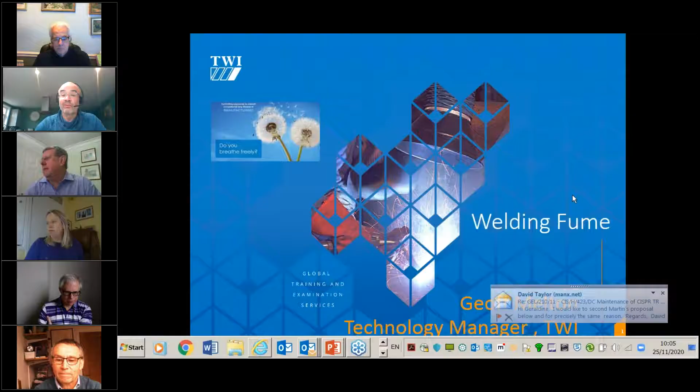This led to developing standards for electromagnetic compatibility, EMC, and the health effects of exposure to electromagnetic fields in welding. At TWI, he leads a wide portfolio of research projects from welding fume to automated welding process developments for low or zero emissions automotive applications.

Geoff also has an MBA from Loughborough University and is a chartered engineer and chartered physicist. So who better than to tell us all about welding fume, how it can harm us, and what we can do about it? So I'll hand over to you now, Geoff.

Thank you. Okay, thanks, Alex. I think, yeah, thanks for that brilliant introduction. I think it certainly got a lot of detail in there. I need to be handed over to my screen, I think. I'm not sure whether I am yet.

Can people see my presentation up now on the screen? Yeah, we've got your presentation, Geoff. So you should be able to crack on with it. Okay, so I'll get rid of my picture so I can't see myself.

Yeah, good morning, everyone. As Alex has told you in a lot of detail, I'm involved in the welding industry. I've been involved in the welding industry for basically the whole of my working life since I graduated, in various roles, including my current role at TWI, which is involved in research for welding and welding aspects of health and safety, and one of those happens to be welding fume.

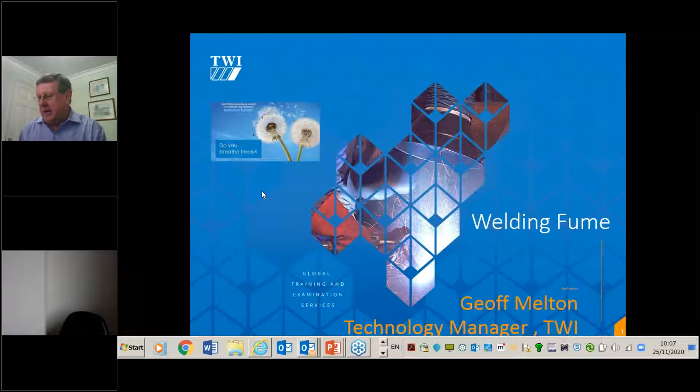So my presentation this morning is about welding fume from my perspective in terms of the work that we're doing, and also the guidance I provide to our member companies. So I have a presentation for you today which covers a bit of the theory of welding fume, and also a bit about how we control welding fume, and my comments are based on feedback we get from our member companies. So I'm hoping if I go on to the next page, which hopefully you can all see now.

TWI, just a very short background to who we are and what we do. TWI, formerly the Welding Institute, headquartered in Cambridge, which is where I am, is a research organisation for the welding industry, and we're a membership-based organisation. So we have around 600 members around the world. We employ around 800 people, turnover 72 million, and we provide all forms of service to the welding industry. If there's anything to do with welding, we're involved, from how to weld materials, how to inspect them, right through to looking at problems that may occur. If something blows up or falls down, we have experts who can advise on what went wrong. So we cover a wide range of topics.

We've got offices around the UK, the main office in Cambridge, where we have our laboratories. We also have laboratories in Middlesbrough, Rotherham. We have an inspection and validation centre in Port Talbot, and we have an office up in Aberdeen to serve the local industry up there.

So we cover everything involved in welding, from how we weld things together, how we ensure the quality of that product, and how we monitor and inspect it. And this is all based around our knowledge of materials and the properties and the performance of those materials. So anyway, the topic today is controlling exposure to welding fume, and I will go through some of the theory of welding fume generation and talk about the control methods for welding fume.

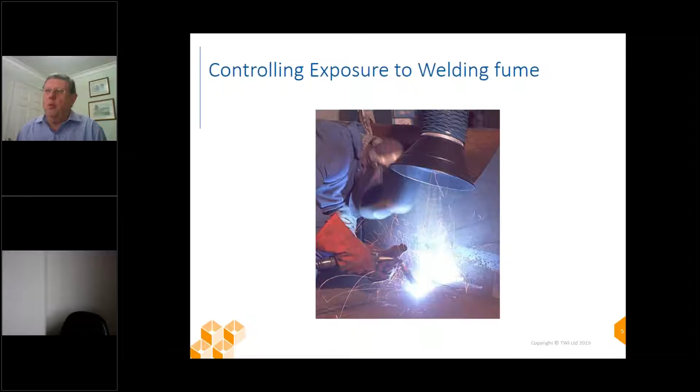There's been a lot of interest, if that's the right word, in welding fume, indeed concerns about welding fume, particularly recently following the IARC publication, monograph 118, where IARC, an international organisation, reclassified welding fume from possibly to definitely carcinogenic. This is a significant change for the industry. Welding fume has many constituents, and some we already know are carcinogens, but this new alert widened that concern for all types of welding fume, not just the fume from stainless steels and nickel alloys, but the fume as well from mild steel processes.

So as a result of the publication of the IARC, after some review by the Health and Safety Executive, there was a safety alert published for mild steel.

This safety alert brings the requirements to control fume in line with those requirements that we've had for many years for stainless steel. But clearly this had a lot of concern within industry, where people then needed further guidance in terms of what they should be doing, the right approach to control welding fume.

Additional to that, there is a continuing reduction in exposure limits for the constituent parts of welding fume. For instance, manganese, where we saw a reduction in the workplace exposure limit in 2018, and hexavalent chrome more recently. And this continues to be the case, and throughout the world exposure limits are falling, and they're falling to very low limits. For instance, for hexavalent chrome, there are now limits in some countries as low as 1 microgram per meter cubed, which is very much on the limit of what you can measure, and very difficult to control.

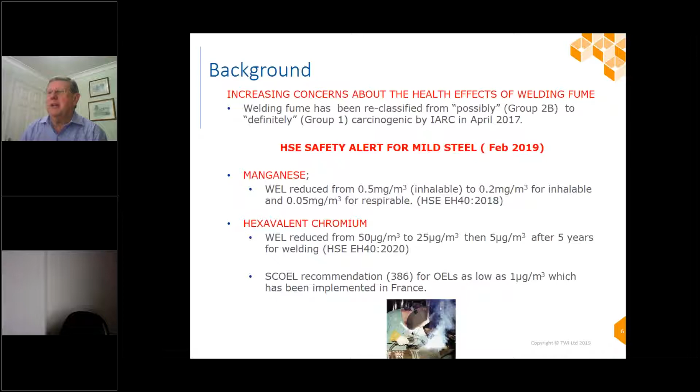So from TWI's point of view, there's a lot more interest in the work that we're doing in trying to minimize exposure to welding fume, and indeed to understand where the welding fume comes from.

Welding processes vary enormously in terms of how much fume they produce. From some of those processes here, which produce very low levels of fume, particularly TIG welding, which is widely used in industry for welding stainless steels, and resistance welding. We have submerged arc welding here, and for those of you that know nothing about welding, submerged arc welding isn't actually underwater, it's under a flux, a granulated flux, and the flux contains the fumes. So we get very low fume from submerged arc.

But if we look at some of the other processes, particularly those that are more widely used in industry, particularly for heavy fabrication, such as the MIG/MAG process, manual metal arc, and the flux core process, we produce a lot more welding fume from the process. And if we look at the hierarchy of control, what we need to do is to reduce the fume at source, particularly from these processes here, which do produce a lot of fume.

We do have arc air gouging here as well, which is a cutting process, and that generates huge amounts of fume. When people had arc air gouging in the past, you could barely see it across the other side of the workshop. Of course, now that's more carefully controlled, but arc air gouging fume is also a particular concern.

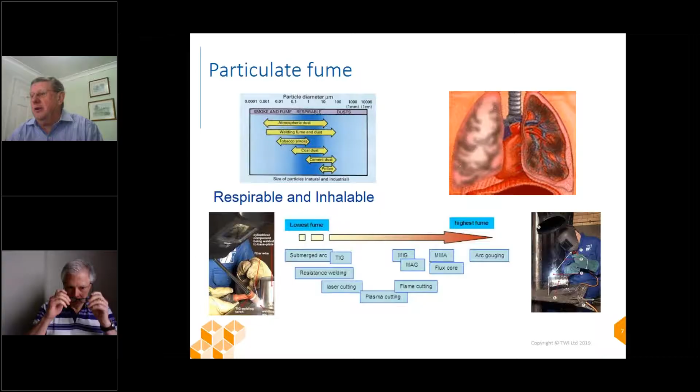Welding fume is of a concern, obviously because it's a carcinogen. It also creates a lot of other diseases. I'm not a medical expert, so I won't go through all these, but it's clear that welding fume, if it's not controlled correctly, can lead to a whole variety of industrial diseases.

There's also concerns from particularly manganese and the effect that that has on the brain. So we have a neurological effect here from welding fume as well, and that's believed to be due to the welders inhaling fume through the nose, and the fume from the nose then goes into the brain. So there are lots of reasons why we need to reduce exposure to welding fume, why we should try and reduce it from the source, and implement good control measures to make sure that our welders can continue to work in a health and safety manner.

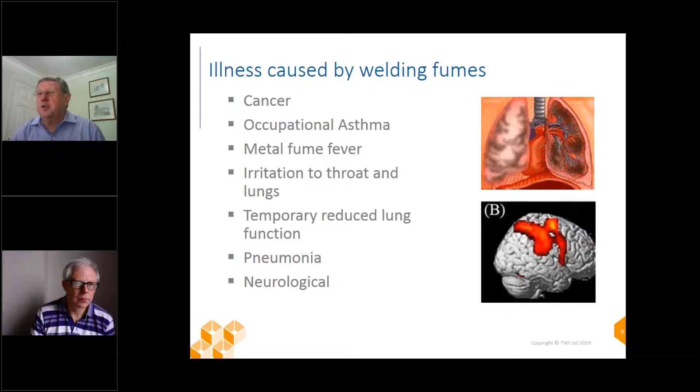So if we look at welding fume from the point of view of trying to reduce it, and a lot of my work is involved in how do we reduce welding fume at source, we need to understand how the welding fume is generated. Welding fume is generated in the welding arc, and it's due to vaporization of the metal, creates a vapor, and also spatter, which is large particles or larger particles that are emitted from the process.

And these particles, the composition of this fume depends very much on the welding consumable we use. So that's the rod or the electrode, rather than the material that we're welding. And that can make a difference, because we can be welding a metal which has a limited composition, but we may want to add other elements to that composition from the consumable, such as nickel, to improve its mechanical properties.

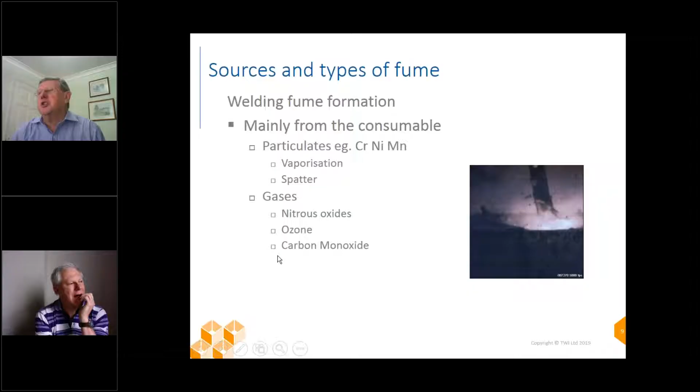So even though we may be welding mild steel, we may still have a consumable which has some other elements which need to be recognized and controlled. Also, welding creates gases. I think gases are often overlooked, not forgotten exactly, but people concentrate on the particulates because we can see those, as opposed to the gases which we can't see but know the process generates. We have nitrous oxides, ozone, and carbon monoxide produced from welding processes.

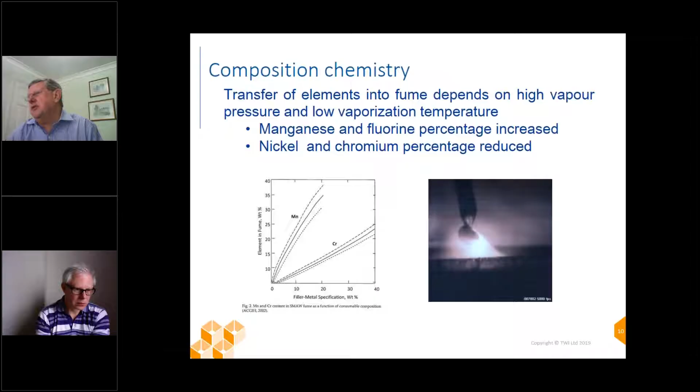Then we get into a bit of physics here, which is quite important when we try to understand the composition of welding fume. Composition is important because we need to control the individual elements in the fume. Some elements transfer much more to the welding fume than others. Although we may have a welding consumable with a relatively low level of manganese, most of that manganese will appear in the fume, unfortunately. So manganese formation is much higher than we'd expect from the composition of the material we're welding, as opposed to chromium, where less is transferred, so the actual percentage of chromium in the welding fume is lower. These are important for understanding how fume is generated and how we can reduce the amount of fume and the composition from that fume.

What I want to talk about is how we can reduce fume at source. So before we move on to control methods such as LEV and RPE, what can we do from the welding process which will reduce the fume? First, how can we develop new technologies for reducing fume, and secondly, understand how we can use these technologies in manufacturing to produce lower levels of fume. As the limits come down for fume, as workplace exposure limits are reduced, it becomes more and more important that we can actually reduce the amount of fume produced at source.

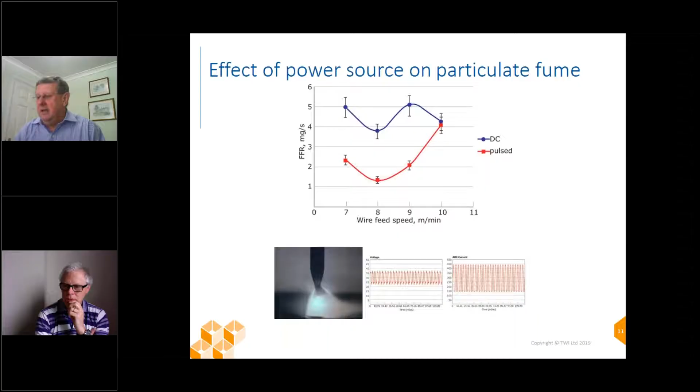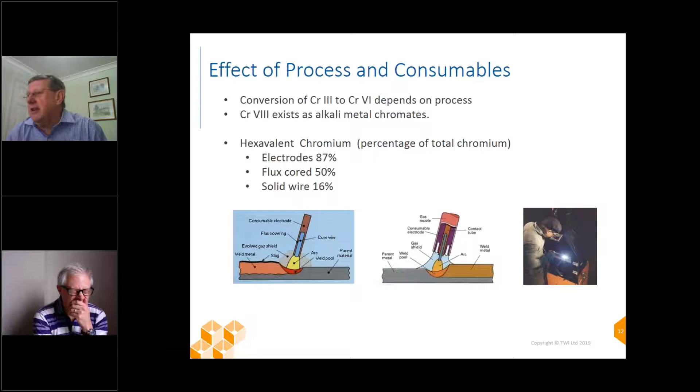If we use a solid wire, the hexavalent chromium is relatively low in the fume. If we use a flux cored wire, it's much higher. So from a non-welding point of view, you may ask, why would we want to use a process that generates far more hexavalent chromium than this one? Well, the reason is that the flux cored wire process has certain attributes that make it better from the point of view of making a weld. We can make welds at higher deposition rate, in different positions, and indeed it's easier for the welder to use a flux cored wire than a solid wire in many applications. So we need to balance the welding process against the amount of fume produced to ensure we can make good high quality welds while at the same time reducing the amount of fume and certain compositions in that fume.

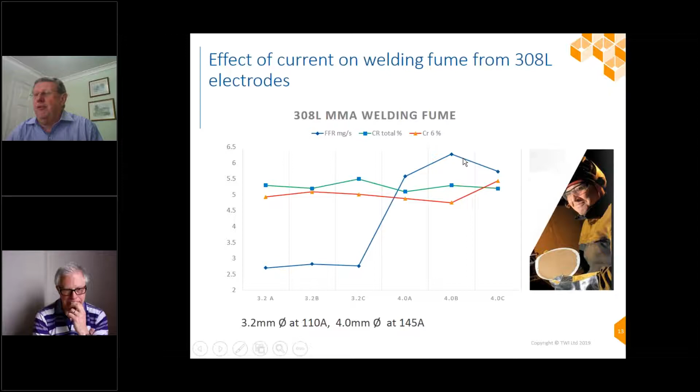The other aspect is just the welding current we use, and generally if we're using high welding currents, we produce a lot more fume than if we're using a lower welding current. The important thing I'm trying to say here is that welding fume varies depending on the process we use and the welding parameters we use. So it's actually quite complicated in terms of how much fume is produced from a given process. It varies on so many things.

One of the other things that affects welding fume is the voltage, which comes down to welder technique. Some welders run a long arc length, giving a high voltage, which produces a lot more ozone than welders using a lower voltage and shorter arc length. So even using the same welding parameters, different welders will produce a different amount of fume. Ozone is generated as soon as a welder starts welding and has a short-term exposure limit value, so it's very important that we control the amount of ozone produced from the process.

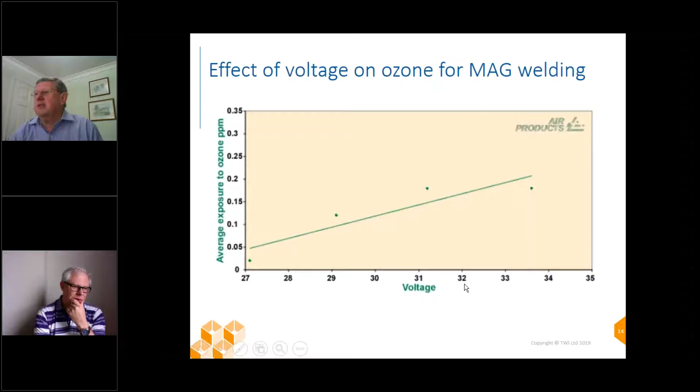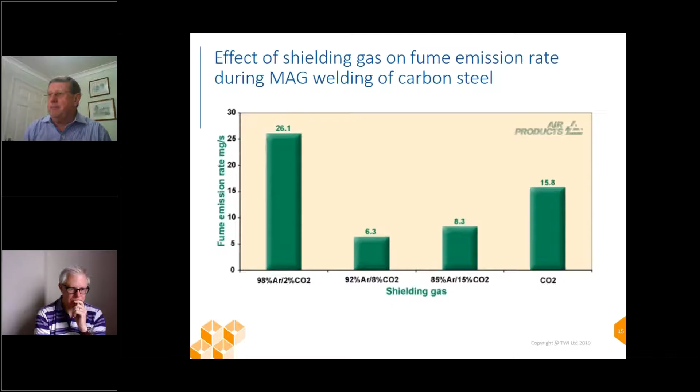TWI does a lot of research into welding fume, and another aspect of our work is supporting member companies, particularly those producing welding consumables with low fume. We provide a service where we can independently test and validate their claims on welding consumables. This is an example of work we did for one welding consumable manufacturer, who developed a product producing significantly less hexavalent chrome, up to 60%.

We have facilities in Cambridge to do fume measurements using a fume box such as this, where we run an arc under the hood, and the fume is sucked through into a filter paper, which Mark is holding here, and then we analyze that filter paper to tell us how much fume is produced and its composition. This is similar equipment we use for manual metal arc welding. So we have processes to measure fume from a whole variety of welding processes, both in the laboratory and on site, where we can go to member companies and do breathing zone measurements for them.

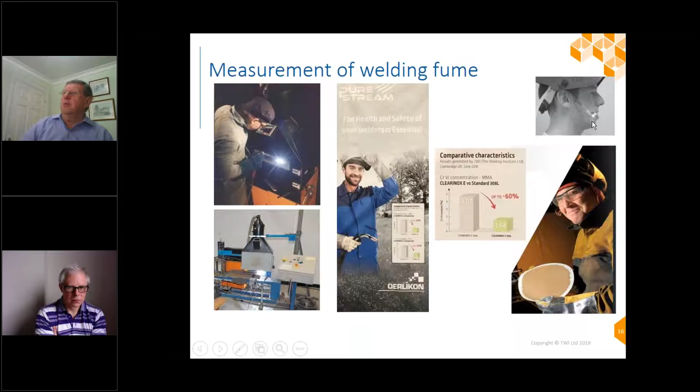Welding exposure limits are continually changing, continually coming down, and there's been a lot of activity in the last couple of years with reductions in the exposure limits for manganese, hexavalent chromium, and also for gases. It's important for the welding industry to keep up with these changes as published in EH40, and one of the roles we provide at TWI is to inform our members of these changes. This also leads to more research into how we can control down to these lower limits, and advice to member companies on control methods to provide control of these reduced limits.

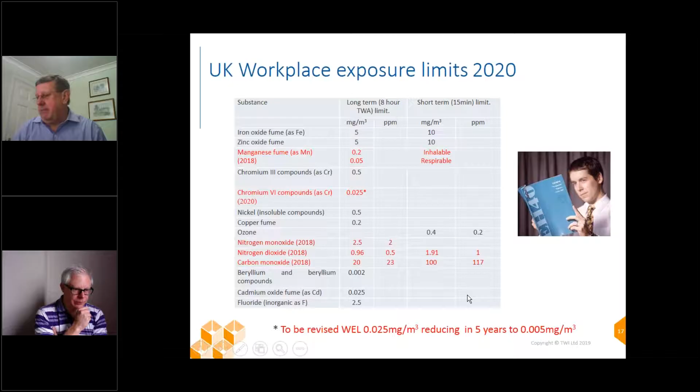Control methods and control measures follow a hierarchy of control for welding fume. We try to reduce the amount of fume at source, using different equipment and different consumables as I've described. Improvements in working practice are also important - basically keep your head out of the fume, but also consider how we present the material to the welder so he can weld in a position where he's not overexposed, or avoid positions where welding fume may accumulate due to the nature and position of the weld. So moving components around to provide better access can also reduce exposure to welding fume.

The next, of course, is ventilation, LEV. LEV is generally required, in fact, pretty much always required these days for control of welding fume. And providing LEV is used in the right way, it can provide good control of fume, reducing fume exposure by up to 80% or more in certain circumstances.

The limitation of LEV is that it's a relatively small hood, and it has to be moved into the right position with regard to welding to make sure the fume is captured. When welding a long structure, this isn't always achieved by the welder, if I can put it that way. So there are limitations in using LEV.

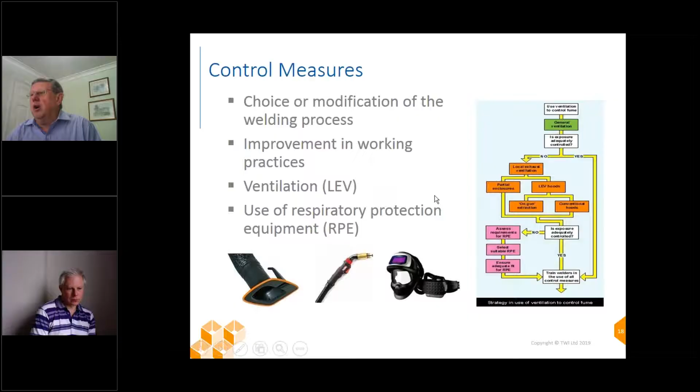So I always like to stress that these other methods, where we're controlling the fume locally, preventing the fume going into the workshop, are important from the point of view of protecting everyone in the workshop, and not just the welder who is protected by his RPE.

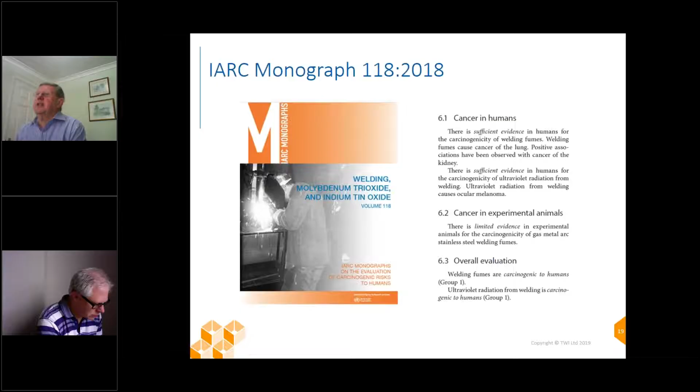So just to finish off, looking at the recommendations for controlling welding fume, this really stems in the UK from the publication of the IARC monograph back in 2017-2018, where welding fume was reclassified as a carcinogen, which led to the safety alert from the HSE.

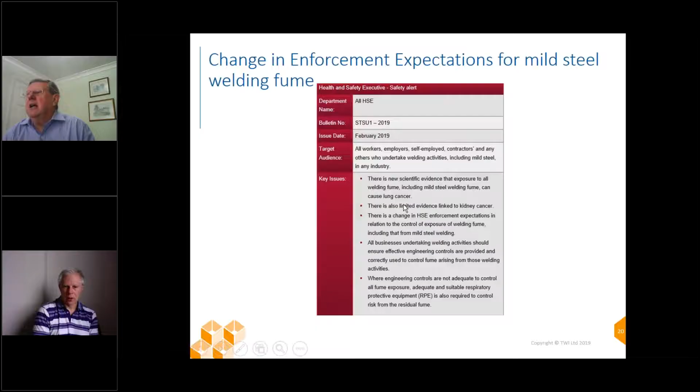A very short statement was issued in February 2019, giving clear guidance in terms of how we need to protect our welders from welding fume from all processes, and particularly now for mild steel, as this guidance has been in place for stainless steel fume for quite some time.

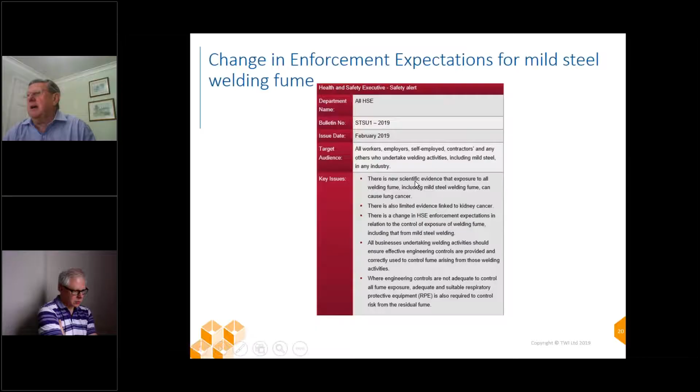I won't dwell on this because that has since been updated. The guidance is clearer now since February 2019.

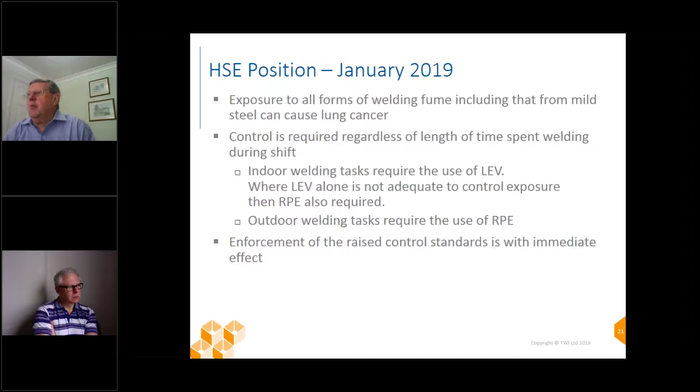Basically, the guidance at that time was that we should use LEV for control of welding fume in all circumstances, apart from when we're welding outside, where RPE should be used. I will go on to talk a bit more about that in another slide.

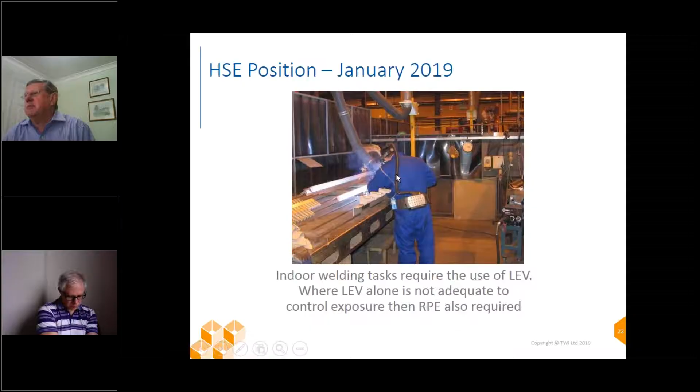But basically LEV is a good method of control of welding fume, and we see here a picture of a welder with LEV and also RPE being used on a workbench. It works quite well on a workbench, but sometimes if we're working on larger components, it can be difficult to control the fume using this method.

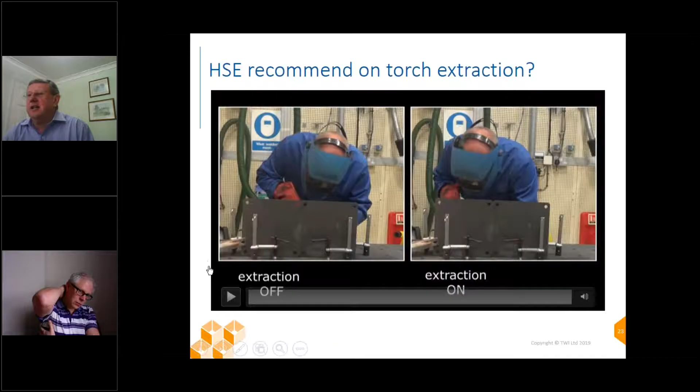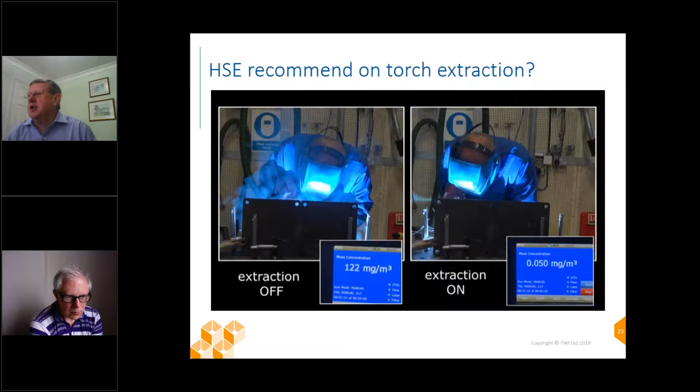We have a good video here that I've borrowed from one of my contacts at HSE, which shows how we can use torch extraction, and that can be quite effective in the right circumstances. We'll see in this video a significant reduction in welding fume.

It works particularly well in this position where the welder is welding downhand, so the fume extraction is over the welding arc. But when welding in different positions, that does not provide such good control as maybe the LEV or the RPE would.

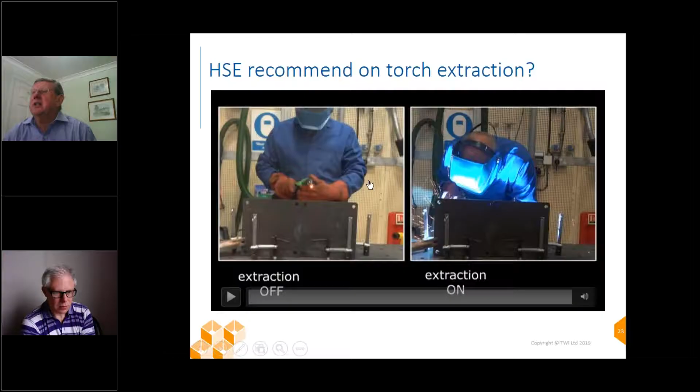Welding in confined space is a particular issue because in confined spaces we have build-up of gases. So if welding is being carried out in confined spaces or spaces where fume may be trapped, it's also important to look at the amount of fume and gases generated from the process.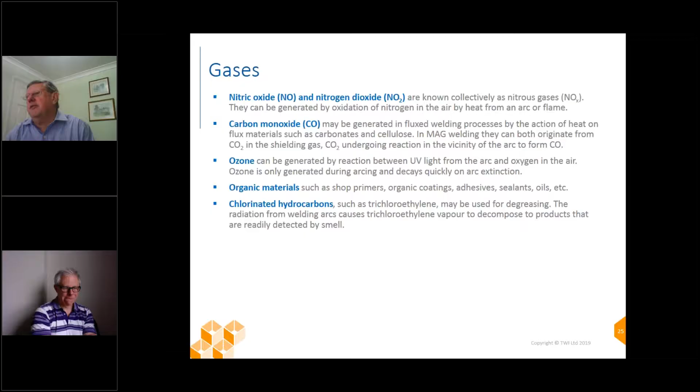So, sources of information: the HSE website is a very good source of information. It's got some excellent guidance and recommendations on welding fume, and it's good to see that now some of the work at TWI is being referenced on the HSE website as well, particularly information about the welding processes.

WL3 was issued since the safety alert, in 2019, and this provides a bit more guidance in terms of recommendations on controlling welding fume. There's a table in WL3 which provides information about controlling welding fume depending on the process and the intensity of use.

In general, the guidance is the same: LEV, and if that's not sufficient, then RPE should be used. But there are cases where we have very low levels of welding activity, such as in repair and maintenance, where general ventilation can be sufficient to control welding fume. This is an important document and needs to be studied carefully to work out the correct control methods, depending on the process and the time that welding is taking place.

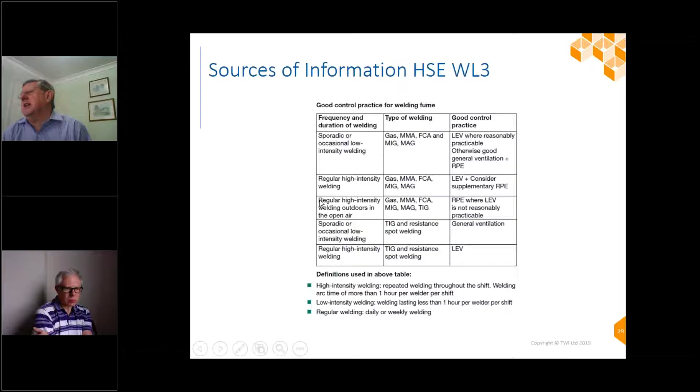TWI is also a good source of information. We publish a lot of information on our website, very much related to welding fume, how it's generated, and control of that welding fume. There is also, of course, last but not least, the Breathe Freely website, and Neil is going to talk next about the Breathe Freely website.

So I've really skipped through quite a few aspects of welding fume, hopefully giving you a good introduction about what it is and how it's produced and how we control it. So at that point, I'd like to thank you and ask for any questions.

Breathe Freely Manufacturing, as we know, focuses on welding because of the combination of significant hazard and a wide range and number of people potentially exposed to welding fumes and gases. When we started pulling this together 3 years ago or thereabouts, we worked with the HSE, and their best estimate was there was about 190,000 workers exposed to welding fume in Great Britain. That ranges from those employed as welders and spending most of their time welding or preparing to weld, to those who do short welding for maintenance or repair tasks. Some will be welding mild steel, others will weld on stainless steel or more exotic alloys with varying toxicity of the metals involved. We'll consider a bit more about that later.

Of course, there's also a number of people that aren't really welders but are involved or exposed to the welding fume, and certainly in my time at JCB we identified that supervisors, potentially forklift truck drivers, and others that spend a lot of time in a welding area are of course exposed to the welding fume as well.

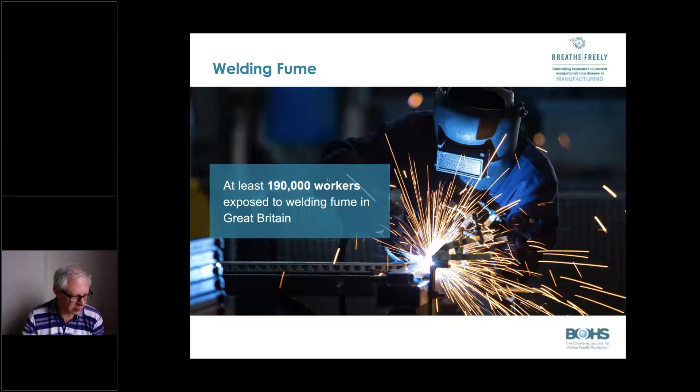From the data that HSE was working with when we were pulling this together, we estimated there are 152 deaths from cancer every year due to welding fume, maybe from the more hazardous metals in the fume, or as recent scientific evidence has shown, exposure to general welding fume.

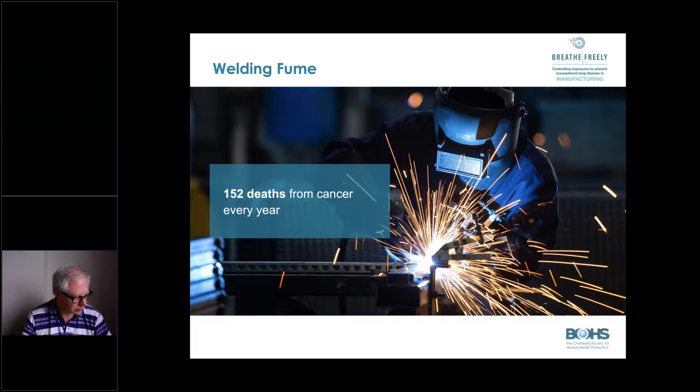Jeff's already gone through a number of these, and like Jeff, I'm no medic, but there are a number of ill health conditions associated with welding at work: asthma, cancer, chronic obstructive pulmonary disease, pneumonia, effects on the nervous system and metal fume fever, reduced lung function, throat and lung irritation. So some significant short and long-term effects that can seriously impact the health of an individual while welding.

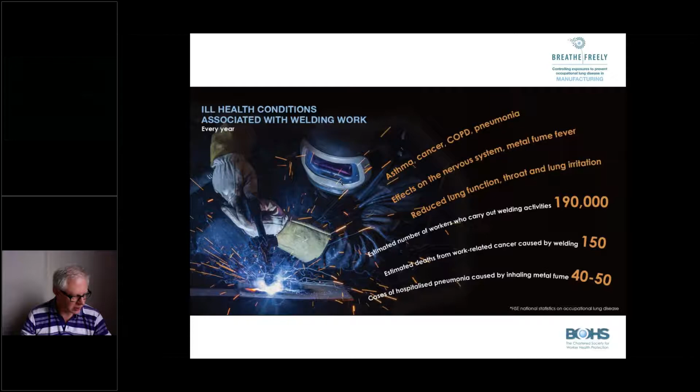As a result of this, we launched our BOHS Breathe Freely 2 campaign for manufacturing in May of 2017 in London.

There were other launch partners in addition to BOHS, the HSE, and Make UK, and we were pleased to have a tripartite approach. So in addition to Make UK and the HSE, TUC were involved, TWI, and obviously we just had Jeff speaking, and 3 manufacturers with significant welding activity: Toyota, JCB, and BAE Systems. Between them, the launch partners agreed the focus, messaging, and developed the materials for the campaign.

We pulled together an information hub, and I'm sure many of you have been to this information hub to take a look, maybe for construction, maybe for manufacturing. If you haven't, please do, there's a lot of information there. We're in the process of revamping the website, but the information itself is actually good, and we don't need to change a great deal, so it's well worth going to take a look.

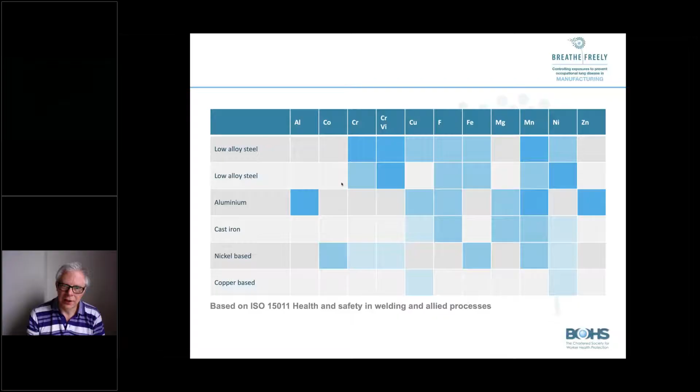Jeff's already gone through a little bit on this, so I'm not going to focus too much on it, but we know that there are different components to welding fume depending on the metals and the type of welding we're actually doing. It comes from the base metal, and it also comes from welding rod or wire. Clearly there are some metals here that are of greater concern than others, but something that we need to be aware of when we're doing any assessments of exposures to that welding fume.

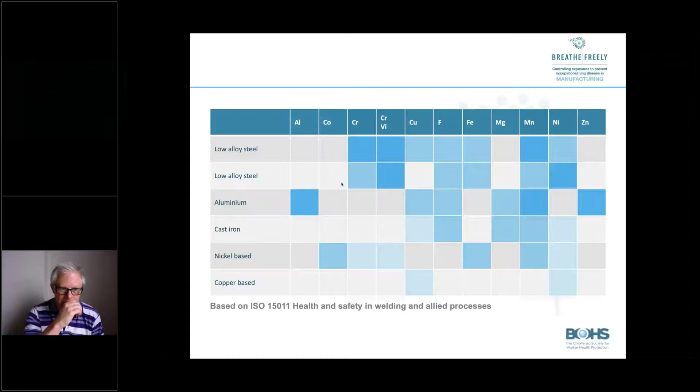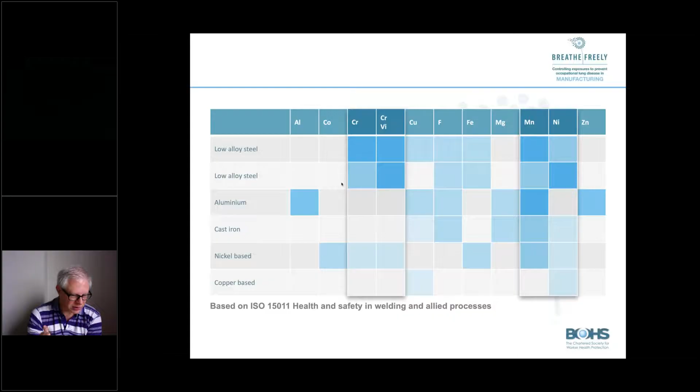From the perspective of welding fume components, these are the ones of greatest concern. Again, Jeff's gone through some of this, so I'm not going to labour it, but it's based on the toxicity and the prevalence of welding on the specified types of material. So low alloy steel can potentially lead to chromium in the fume, chromium, hexavalent chromium, manganese, and nickel.

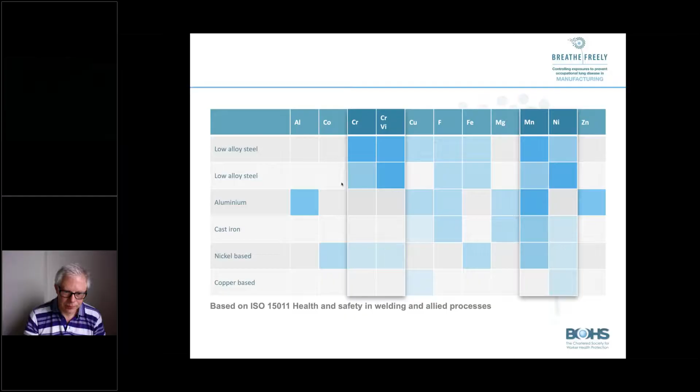We've already seen the workplace exposure limits, just making sure they're here. As we know, the workplace exposure limits for some of these components are tight or very tight and are likely to be exceeded unless we've got effective controls implemented.

Following a change to the limits in August of 2018, the WEL for manganese is now as restricted as hexavalent chromium, although of course that's going to tighten further for the respirable fraction. This is particularly important for duty holders using metal inert gas on low alloy mild steel.

This often involves manganese in the welding consumable. As we've seen in the graph Jeff showed earlier, even though it may only form 1 or 2% in the consumable itself, manganese is more volatile and can be up to 10 times that proportion in the welding fume. Certainly at my time in JCB, that's exactly what we found.

We were working with 1.5% manganese in the welding consumable, but actually in the fume it's about 15%. Therefore, the tenfold reduction in the WEL for manganese in August 2018 makes effective control of exposures much more challenging than it was previously for MIG on low alloy steels.

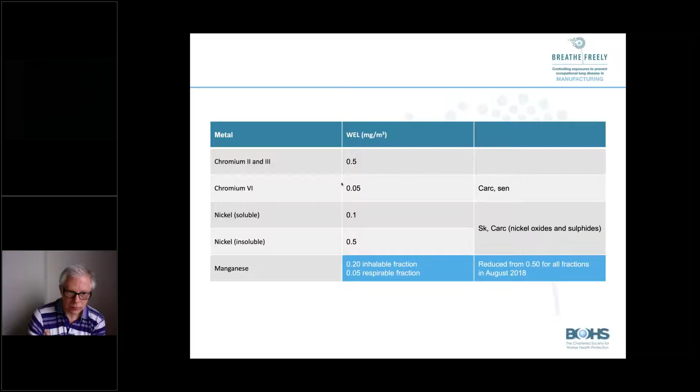But it's no longer just certain components of welding fume that are identified as carcinogens. I'm sure you're aware that as a result of an extensive review by the International Agency for Research on Cancer, they reclassified all welding fume as a Category 1 known human carcinogen for lung cancer in July of 2018.

They also identified some evidence of a link to kidney cancer, but were unable to form quite such a positive link as they did for lung cancer.

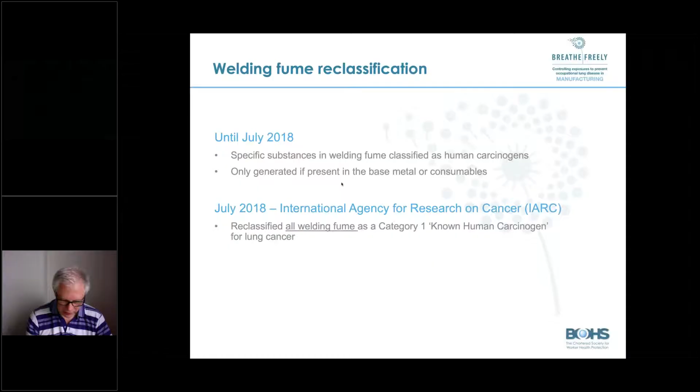So HSE enforcement expectations were reviewed as a result of the IARC reclassification, and HSE concluded that risks had changed so markedly that a safety alert was justified, and that was issued in February of 2019.

That essentially now says that for any internal welding inside, you need LEV. That's a significant step change, particularly for MIG welding, where previously that hasn't really been the case. There's been a lot of MIG welding done without LEV in place because it was considered to be relatively benign. Clearly that is no longer the case, and extraction is now required.

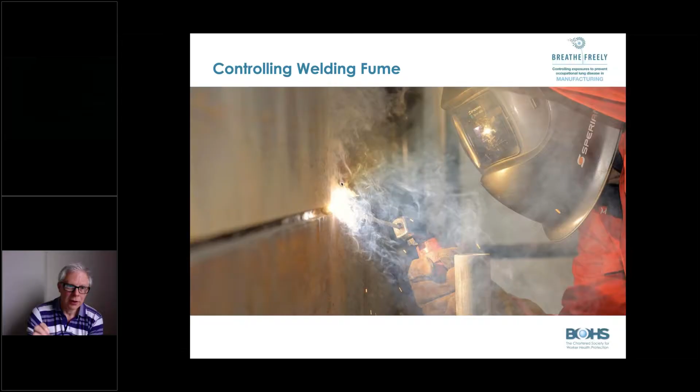I'm only briefly going to consider control. Jeff's already covered this in more detail in his presentation, but we're all well aware and very familiar with the hierarchy of control, from the most effective at the top to the least at the bottom. Often several controls are required from different parts of the hierarchy, and Jeff has worked through a range of approaches to consider.

Clearly, if we can eliminate, we should eliminate the process. There is a possibility of moving to an alternative joining technique, maybe glues, or maybe a different type of welding that doesn't actually require quite the same process with quite the same fume coming off.

Also a possibility of process modification, so automation - a robot that's doing the welding, it can be completely enclosed and the fume can be extracted, and the people are taken away from the process.

Of course, local extraction, Jeff talked about on-torch extraction, that can be very useful, particularly for very large components. If you've got smaller components, actually a bench type extraction is also a very good way of doing it. Downdraft or backdraft can be very effective. And of course, there's the elephant's trunk, which, as Jeff pointed out quite rightly, the welder tends not to move and therefore it tends to be a little unreliable.

Jeff talked about working practices and the possibilities around changing welding parameters, but also about reorganizing the workplace and reorientating the weld to make extraction easier and work easier. And of course, there's RPE.

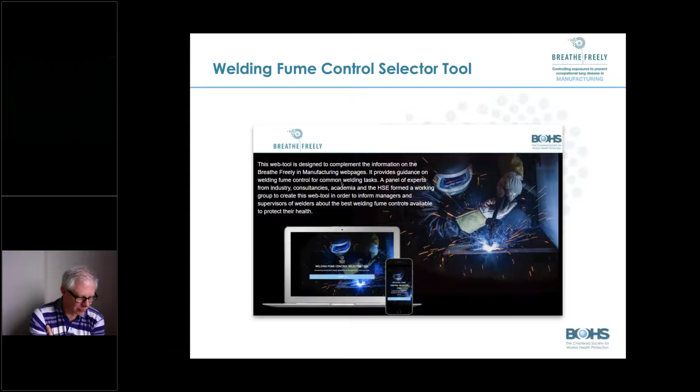Of course, you may find yourselves helping that duty holder. So let's take a look at what we can get out of the selector tool.

Well, first of all, an introduction to the working group, which included members from BOHS, representatives from the HSE, and is endorsed by the HSE as an effective method of selecting the right control.

Starting at the back left, we have Andrew Kennedy, Mike Slater, John Saunders, Don Pocock and Adrian Hurst. And on the front row, left to right, we have Dave Marsh, Adrian Paris and Marion Malloy. They pulled a great bit of work together in creating the welding fume control selector tool.

To help duty holders, we used a 5-star rating system to show real-world effectiveness of the extraction systems recommended by the tool. The overall rating is derived from the average of the 2 scores for the fume control system and user reliability. The system rating assumes an appropriately designed system which is matched to the process, is in good working order, and is set up so it can be used correctly.

The user rating is based on how much control the user has. So if the control is heavily dependent on the user, it will have a low reliability score. If it's fixed in the right position, it will have a high score. You probably already figured out that the flexible and movable outputs trunk arrangement scores poorly on the user rating because, as we know, it tends not to get moved.

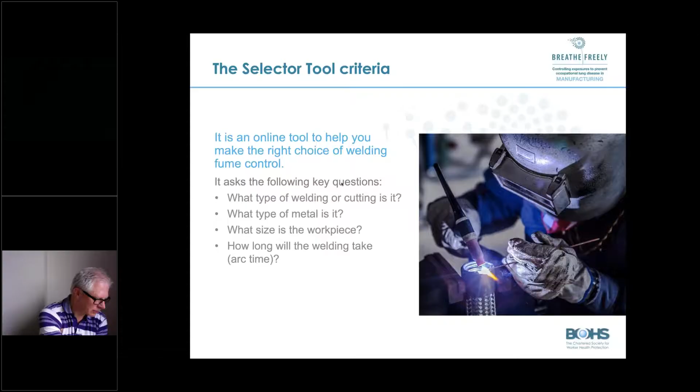The selector tool provides advice on the best available control solution for the task criteria selected by the user. It also provides links to other suitable alternative fume control solutions, as it is recognised that for one-off jobs it may not always be possible to have the optimum control solution available. And with every fume control solution, there are limitations to its use and its ability to adequately capture fume, which are addressed on each control sheet.

Our intent was to develop a tool that was simple to use but not simplistic in the information it provides, so that it was useful for the duty holders. I'm pleased to say that the selector tool has been endorsed by the HSE and the duty holders are frequently directed to it by them.

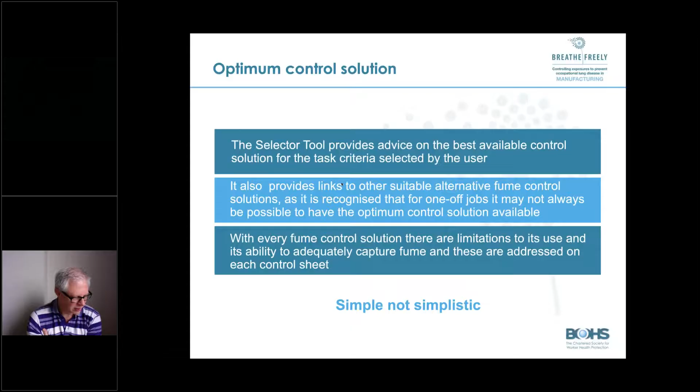To help duty holders, we also provide management advice sheets from links in the control sheets with appropriate advice on a number of topics, including the design of LEV, the installation, commissioning and testing of LEV, and health surveillance.

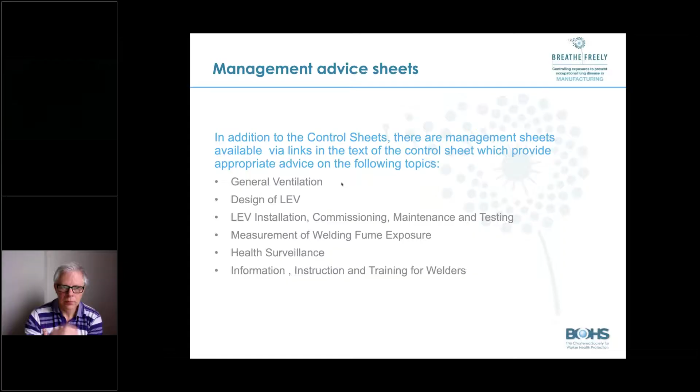Normally, I'd go into a demo of the tool and have everything crossed as it would work on the available Wi-Fi. However, that seemed too much of a stretch for today while using the connection to also present to you all. So what I'm going to do instead is suggest that you take a look, preferably at the end of the regional meeting, but if you must have a fiddle with it now, then please go ahead once you've heard from the presenters. When you do have a go, I hope you'll all agree it's simple and easy to use while giving some useful advice.

Of course, any suggestions for making it better are always welcome. We're in the middle of a review of it at the moment to do just that. So if you've got any suggestions, please do let us know.

Given the resource challenges experienced in 2019, we recognised that any new approach had to be sustainable for BOHS, so we're focusing on a number of key areas. Following feedback from our colleagues in the LEV industry and following up on a planned refresh, we've initiated the review of the welding control selector tool.

I'm pleased to say that some of our LEV colleagues have joined us in this review, so the working party has a wider group of stakeholders involved. As part of the update to the BOHS website, the Breathe Freely site will also be redesigned to draw in more traffic, assisted by our colleagues in TWI, who are providing some excellent input.

As Chris has already explained, I've had the pleasure of working with Mike Slater to update the CCHRC, the Certificate in Controlling Health Risks in Construction, training courses, which have been successfully piloted and will be launched again next year. This update has restructured that course, facilitating conversion into other areas such as manufacturing, mining and so on.

And we expect to follow on the construction review with work on equivalent manufacturing courses. I'm also pleased to say that Breathe Freely has expanded globally with our colleagues in Australia and New Zealand picking up the baton.

And in fact, Australia at the moment are working on some advice and guidance for people welding outside. They did wonder whether we might want to help them with doing that, but I suggested to them that there's probably only about 3 or 4 days in a year when we would even consider working outside without some sort of enclosure, so they were much better placed to do it than we were.

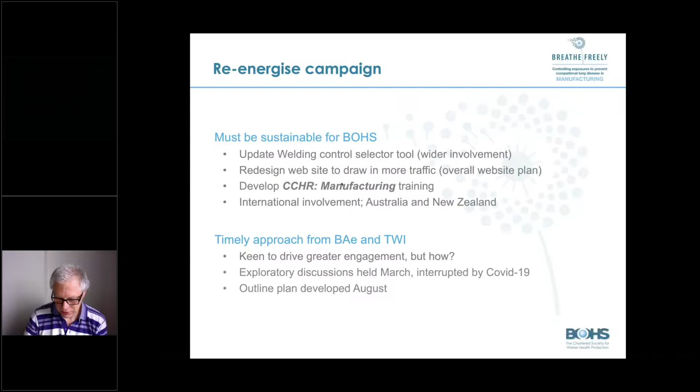We've aligned our strategic objectives between the 2 Breathe Freely campaigns, the delivery of which will be modified by the specifics of each campaign. We use a multi-channel communications and marketing plan to reach all key audiences.

For the manufacturing campaign, that means we'll leverage TWI and consumable suppliers contacts. We'll re-engage our steering group, look to recruit new participants and volunteers to avoid reliance on just a few people, look to generate media coverage in as many ways as Rita in head office can come up with, helped by the volunteers, of course, influence decision makers when the opportunity presents itself, and motivate our stakeholders, of which we need many more, to embrace and share the campaign and spread the word.

Of course, our ultimate vision is to reduce the risk of occupational lung disease.

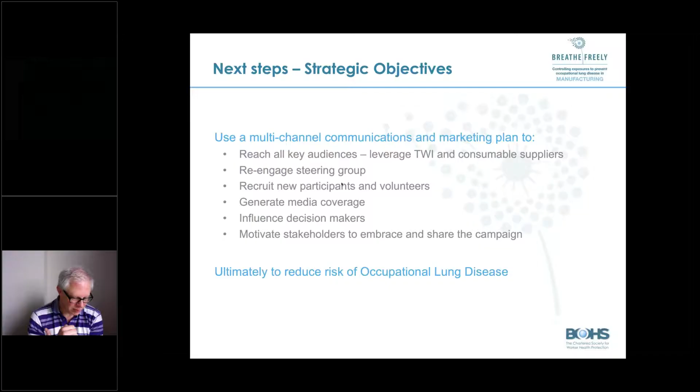I know you're all muted, but I can still hear you all asking, but Neil, how can we help? Well, I'm glad you asked. We always welcome new ideas and anything you think will help the campaign.

Any new ways of connecting with duty holders who are not currently aware that Breathe Freely exists or who have not engaged fully with it. Perhaps you can volunteer to help out in whatever way you think you can. How about new links into stakeholders, particularly those with further links into further duty holders? Or perhaps you can help champion what we're doing. LinkedIn can be a tremendous tool to do that.

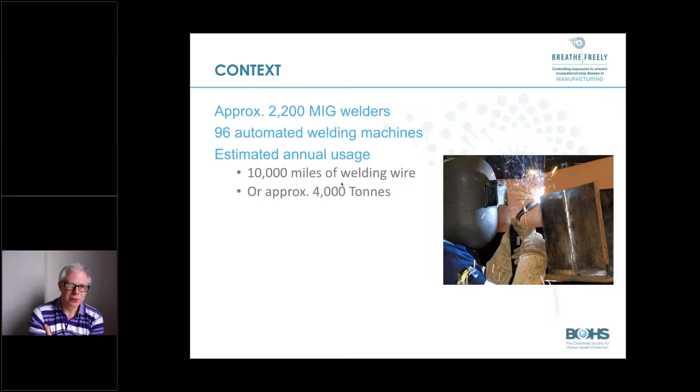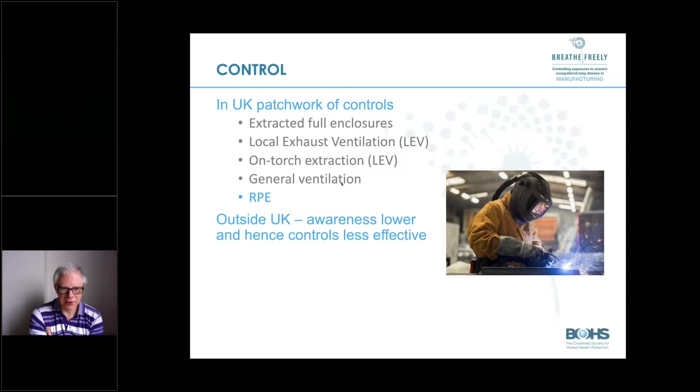In the UK, we had a patchwork of controls. We had extracted full enclosures, local exhaust ventilation, on-torch extraction, general ventilation, and respiratory protective equipment. Outside the UK, the awareness was lower, and hence the controls were less effective.

The manganese limit was challenging for MIG on mild steel. As we've said before, 1 to 2% manganese in welding rod, but 10 to 15% in the fume itself. The varied controls meant that sometimes we relied on RPE, so we did some analysis.

Of 21 personal exposure measurements that we had outside the RPE, 18 of those, 86%, exceeded the new manganese WEL. Previously, it had just been 10% exceeded. Without RPE, our welders would have been overexposed.

Of course, that also asks the question about supervisors and other people that are working in there. And yes, there were some of those that were being significantly exposed to manganese respirable fraction.

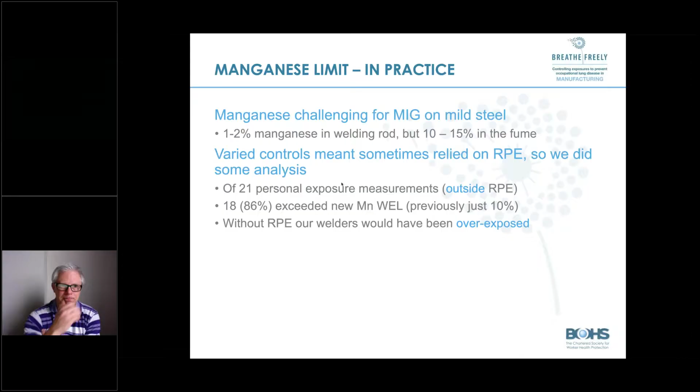So we needed a commitment to action. We recognise this as a global significant potential health risk. We proposed and got buy-in to a global project, which was brought off at the HS&E board.

We appointed a senior sponsor, an MD, to one of the businesses. We pulled together a project team and a leader, obtained external expertise to assist us, and monitor progress through our governance process.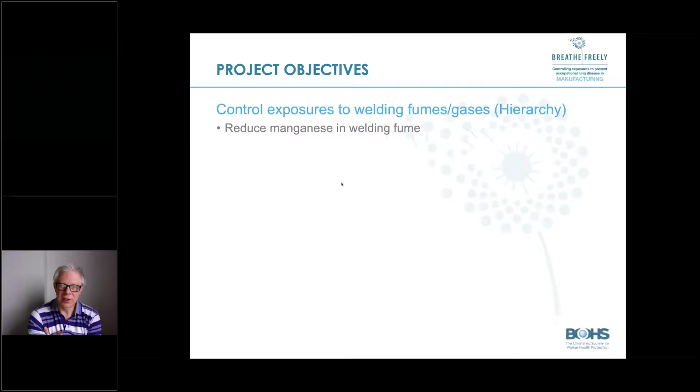In terms of our project objectives, we look to control exposures to welding fumes and gases using the hierarchy. Reduce manganese in the welding fume. Consider alternate joining techniques, automation and reduced welding.

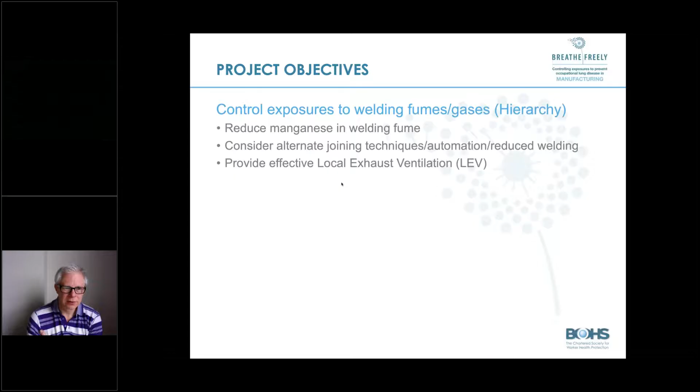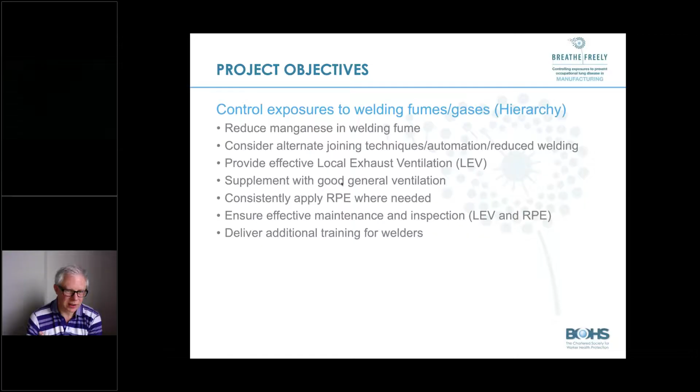Provide effective LEV. Supplement with good general ventilation. Consistently apply RPE where it was needed, and ensure effective maintenance and inspection of that LEV and RPE. And also deliver some additional training for our welders to make sure they understood what we were doing and why we were doing it.

In terms of the activities, we did a review. So we used external occupational hygienists to review our welding processes. We wanted to give clear advice and support on good practice control.

We did very limited exposure assessments at this stage. We used the Mark 1 eyeball to take a look at the welding and to decide whether a particular type of LEV was most suited to the task. In many of our cases, our components were big, so it turned out that on-torch extraction was the most effective.

But we did have some cases where the on-site review was able to identify the possibility of downdraft booths or other extracted enclosures in order to do effective control.

We did a little bit of exposure assessments to confirm control, but only after we'd made improvements. We didn't try and measure where we knew we'd already got a problem.

We also took a look at the robot extraction systems to see how effective they were. And as you might imagine, they range from being completely effective to being entirely the opposite, with fume leaking out the sides, because the robot had been changed, maybe the dimensions had changed, maybe the weld went a little further than it did originally, and it got out of the extraction system.

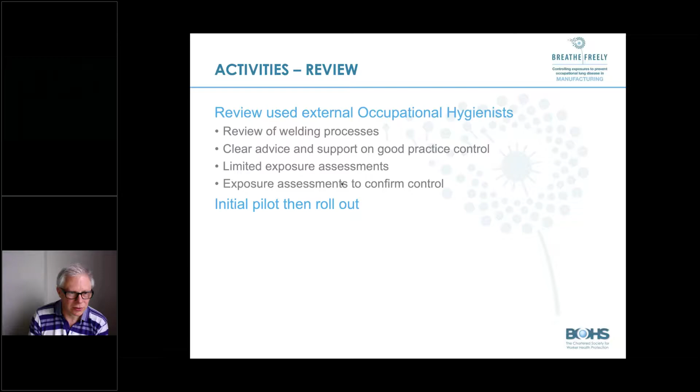Once we'd done a pilot of the review on site, we rolled it out across the organisation. As I said, we really did need to employ on-torch extraction because we had large components, complicated components, and it wasn't possible to get LEV into the right places other than on-torch.

So we did some on-torch extraction trials to test the new generation of weld sets, and I have to say they were a lot better than the previous generation of weld sets. We had Group Manufacturing Engineering involved in this, and they led on this particular aspect of it. We had 5 suppliers in the trial.

The effectiveness varied, to be honest, and partly that was the way it was set up, and partly it was just the kit that they used. What we did do, though, was we gave them free rein to set their kit up, so there could be no complaints from the suppliers as to how it had been done. They set it up, we then did the tests.

We tested, in addition to the fume control, where we found around 70% reduction. It does depend on the orientation, but for our particular type of welding and the orientation of welding, we got around 70% reduction, which is excellent compared to nothing at all.

We tested the efficiency, of course, the ergonomics, the weight, the heat, the preference by the welders to help us come out with a solution that as many as possible would like.

We piloted across one business once we'd identified the right tool and the right extraction combination. So we had 90 sets, and that was very successful. We were just ironing out the last wrinkles when COVID arrived, unfortunately, and we didn't get to quite finish that this year, but the system was working well.

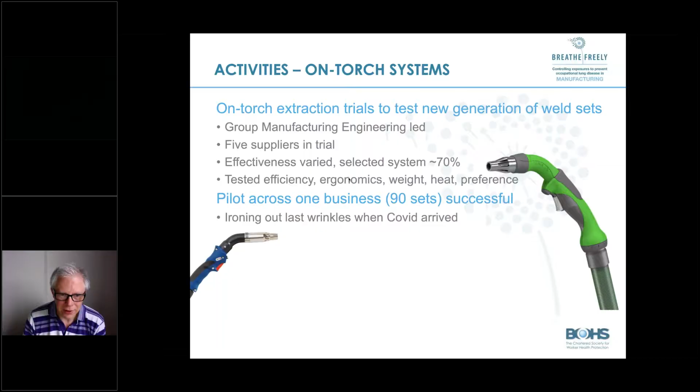Okay, a very quick trot through, but thank you very much for your attention. I think, Lee, you might now be seeing if there are any questions for me.

Yep, thank you very much for that, Neil. We do have a question straight away. Give people a minute or two to type in their own. How would you do air monitoring for soluble nickel as opposed to insoluble?

A good question, and one that I would have to look up, to be perfectly honest. It's not something I've needed to do for quite some time. So if there's anyone else already on the presenters that feels they can chip in, they're very welcome to. But it's not one that I've needed to do, so I'm very sorry to say I can't. I'm not going to try and give an answer to it.

That's fine. We've got a number of questions coming in that I can send over afterwards, so I'll give you a bit more time to answer them and we can send them back afterwards. But we do have another one in the meantime.

For an employer looking to purchase an LEV system for their welding process, how will the new ALARP approach, as well as WELs class, affect the benchmark in their specification?

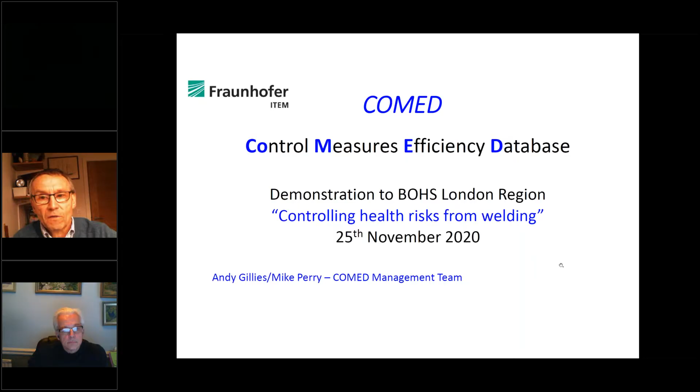A special feature of this database is its rather unique combination of an academic institution, the Fraunhofer ITEM Institute, combined with one of the premier occupational hygiene professional bodies worldwide, BOHS, plus individual occupational hygienists and practitioners contributing in many ways to its development. It's quite a unique combination. The database contains information summarizing peer-reviewed literature on control measures, and also information from unpublished work, the so-called grey literature, derived from hygienists and other contributors.

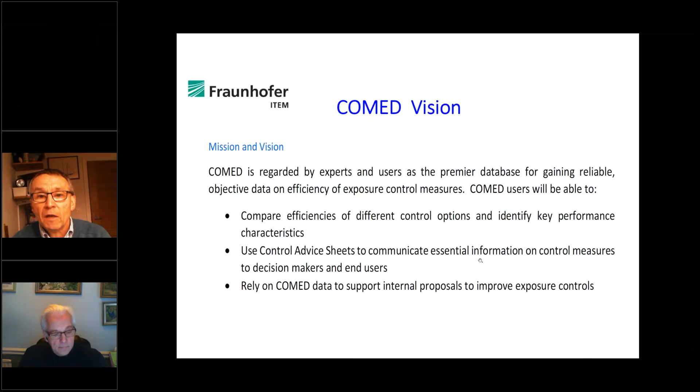So without further ado, I'll hand over to Mike to give you a quick demonstration of what it looks like. Thank you very much, Andy.

Can you hear me all right? Am I being heard? Yep, yes, I think we can, Mike. You can hear me, good. Just confirming. Okay, so COMED, I'll give you...

I'm very aware we haven't got a lot of time, so I'll do a quick run through of how the database works from the user point of view. We've got four tabs at the top. The first covers background information, a user manual, and so on—this is still underdeveloped, just about COMED with some links. I'm going to jump straight into the data entry, open database tab, and here you'll see all the data sets currently in the database. We've been adding these over a period of years. As a user, you can come in, and of course you don't want to see all of these straight away.

We're interested in welding, so I'll select welding. The search string isn't working at the moment—that'll come later. So if I search, now you'll see all the data sets relating to welding are highlighted. You can browse through those and open them at your leisure to see the summary information. I'm going to go straight to this one here because I know it's Andy's. If I open it, this is basically a summary of the information that Andy has gleaned from the study itself.

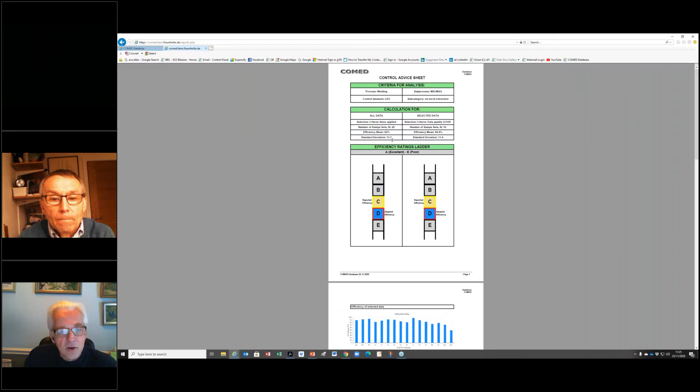So the idea is that this will dynamically adjust for the statistical considerations of the data set you pull back. In this case, all data is pretty much the same as selected data, not a lot of difference, so it's not showing a difference. But if you whittled this down enough, you might be able to prove that the data is actually more efficient than all data would suggest.

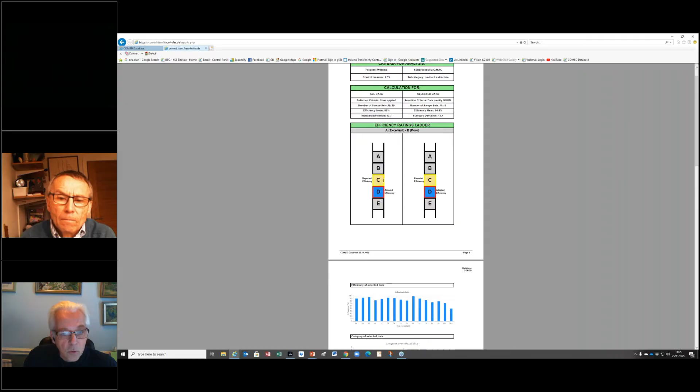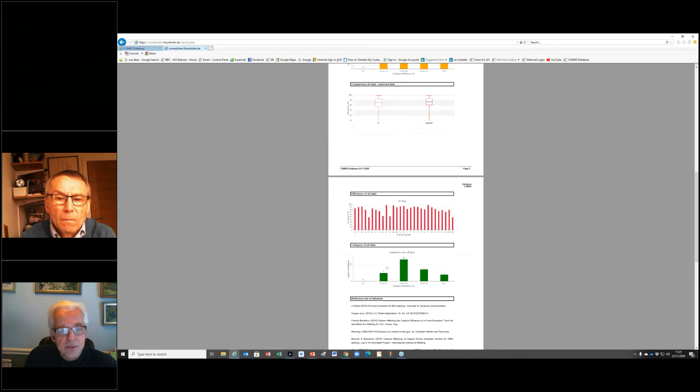And down here, on this page, you've again got the same information I showed you a few minutes ago, but along with all the references for the different papers it has come from. Okay, so I'll close that down. The final thing to show you is what we call the CAS sheet, so I'll open this, which is a control advice sheet.

These are kind of standalone advice documents based on a particular control measure. I'll open this one up - and obviously we were talking this morning a lot about torch extraction. The idea of this page is to give an easy to use reference document which discusses all the pros and cons. We're going to engage with experts to contribute to this so you're aware of what you're getting into when you choose a control measure, and that might include cost factors as well as pitfalls and advantages.

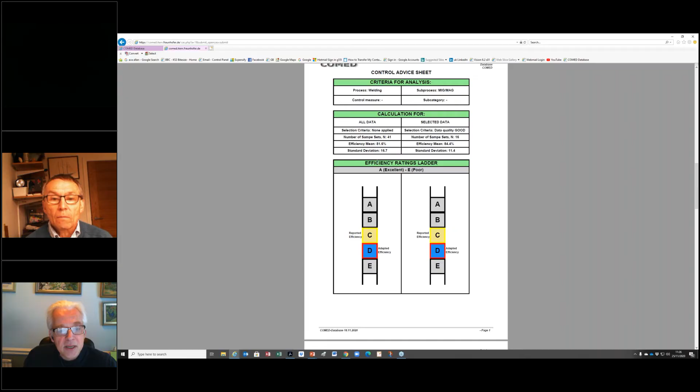Based on the best information within the database, we've got the ladder of performance again, so you can print this off and compare and contrast different control options. The whole system is geared more towards thinking about data, enabling you to dip in and look in more depth at the options available and what information is out there. So I think that wraps it up for me - I hope I've not gone on too long.

Andy, shall I just pass back to you now then? Okay, thanks Mike. And the next slide, if you could just advance it please. Oops - this one, yeah, that's the one.

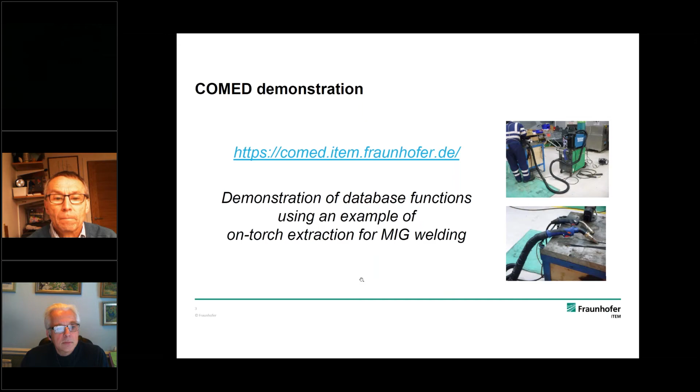So to follow on from that great demonstration from Mike, the content and functionality of the database we're working hard on at the moment to improve it continually. We're very pleased with where we've got to, but we recognise there's a number of improvements we still need to work on before we launch the database publicly.

We are looking to identify organisations and individuals to become supporters of COMED. That may be in a number of ways - to partner with the project leaders, to sponsor the database in its development. Organisations that support the COMED project in that way will have premium access to the full database, an option to join the advisory boards we'll be appointing to overview and steer the development of the project over the years ahead, plus marketing and promotional opportunities in any literature associated with the COMED web tool.

So finally, next slide please Mike - how can you get involved? As Neil issued a call to all of us earlier on, it's a mirror call from our COMED team. We'd be very pleased to hear from any individuals or organisations who find this project of interest and want to explore how they may get involved further and sign up as a supporter of COMED.